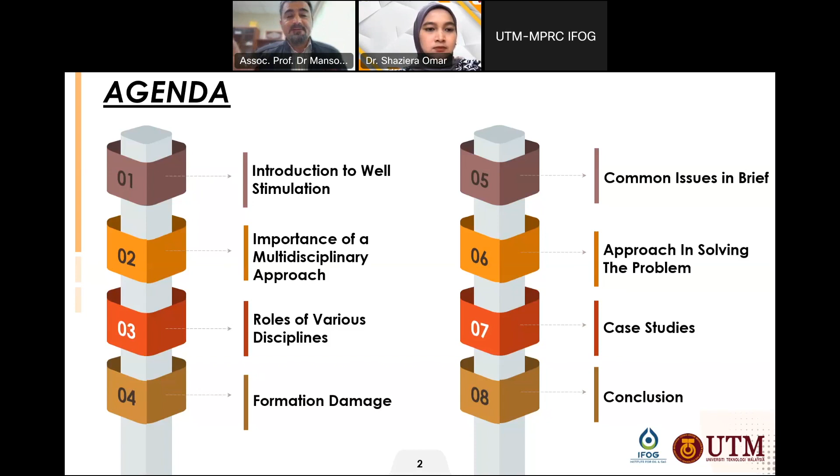So this is the agenda. We'll start with an overview of well stimulation, followed by why a multidisciplinary approach is crucial. Then we'll delve into the roles of different disciplines in the process, discuss how we can enhance stimulation effectiveness. We'll also touch upon formation damage, and specifically for scales and precipitates, an approach to solving the problem, before diving into some case studies, and we will wrap up with our conclusion.

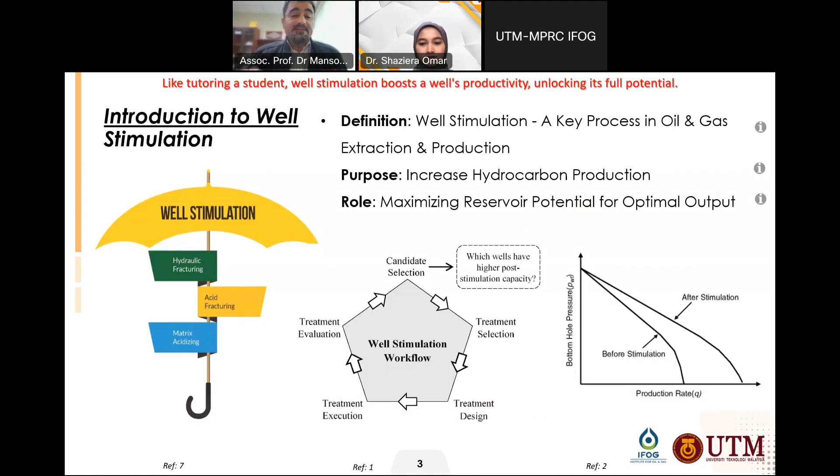Well stimulation at its core is a process designed to enhance the productivity of oil and gas wells. This process involves various techniques aimed at increasing the connectivity and permeability between the reservoir and the wellbore.

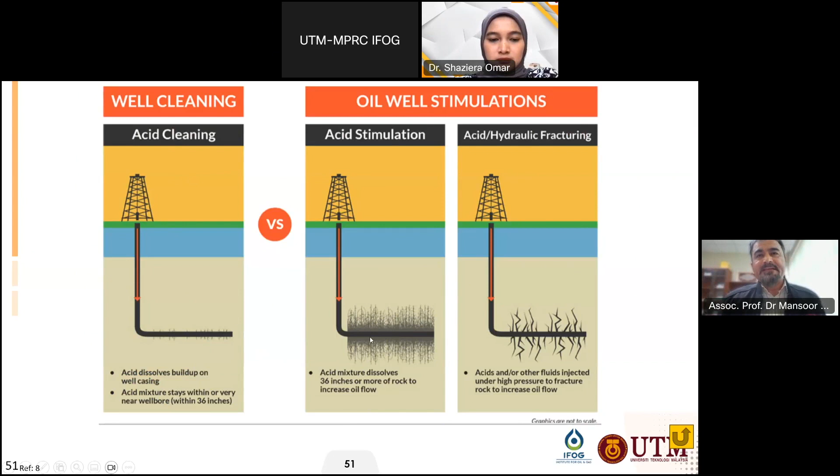Here you can see well stimulation techniques - this represents our reservoir, and this is our wellbore. The main difference between well cleaning and well stimulation is that for cleaning, the acid remains near the wellbore, but for well stimulation techniques, the acid will actually penetrate deeper into the reservoir, depending on the pressure applied.

Let's go for the purpose - why do we actually need to stimulate wells? The ultimate goal here is to increase the production of hydrocarbon. Over time, the natural flow of hydrocarbon may decrease due to various factors. Well stimulation serves as an intervention to ramp up the production.

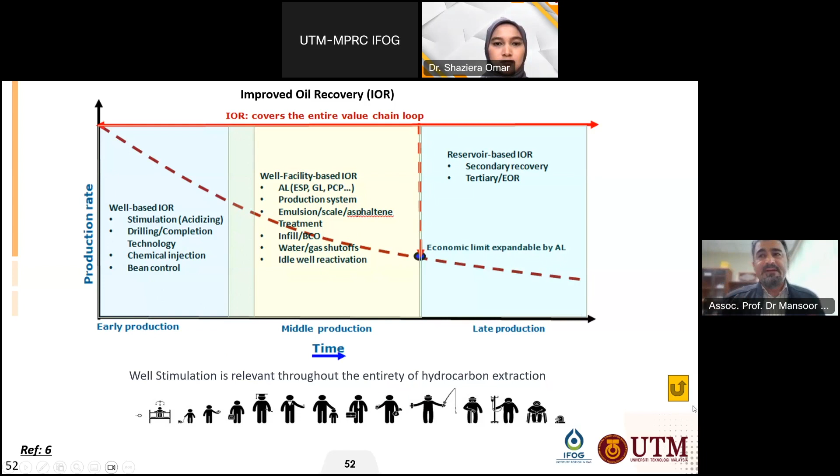Just as education and exercise enhance human development and longevity, well stimulation optimizes the productivity and lifespan of hydrocarbon reservoirs. Both processes aim for peak performance over the course of the life of the reservoir. As you can see, this is a plot showing production rate versus time, and in each production phase, we need well stimulation to increase production, depending on the presence of damage. So it's relevant throughout the entire hydrocarbon extraction process.

Now let's focus on the role of well stimulation. Maximizing reservoir potential is the key. Think of it as getting the most out of the fruit juice - you want to squeeze it until the last drop, right?

Similarly, well stimulation ensures that the maximum possible hydrocarbon is extracted from the reservoir, leading to optimal output and efficiency. On our slide here you can see a flow chart that depicts various types of stimulation. We have hydraulic fracturing, acid fracturing, and matrix acidizing.

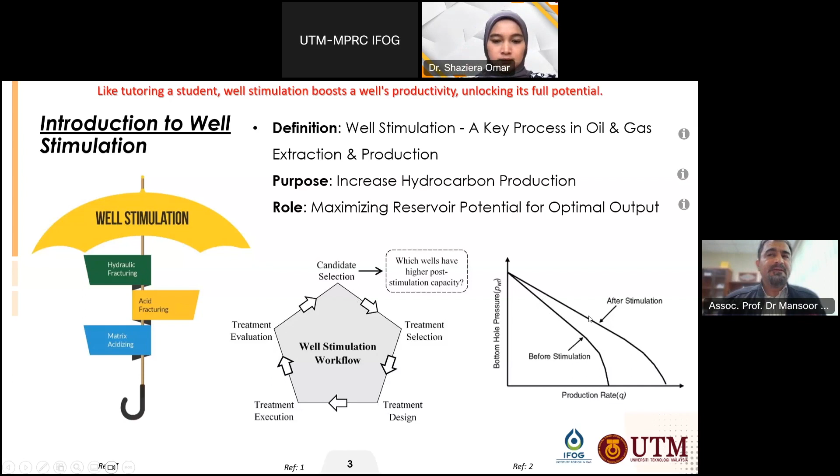And of course, we have a workflow that shows actually different processes and steps in well stimulation, starting from candidate selection to treatment evaluation. And finally, this chart shows how stimulation can increase production.

This is really showing the inflow performance relationship for a well after and before the stimulation. So the importance of the multidisciplinary approach. Today we're going to tackle the multifaceted world of well stimulation. Optimizing well stimulation and maximizing reservoir potential is not a one-man job, or rather a one-discipline job. It requires collaborative expertise from several fields: flow assurance, geology, geomechanics, chemistry, and other disciplines. All of these fields of expertise play an essential role, much like key components in the complex mechanisms of well stimulation. Flow assurance

ensures reliable flow of hydrocarbon. Geology actually provides us with understanding of reservoir and physical and chemical makeups. And then geomechanics offers insight into the behavior of rocks under changing physical and environmental stresses.

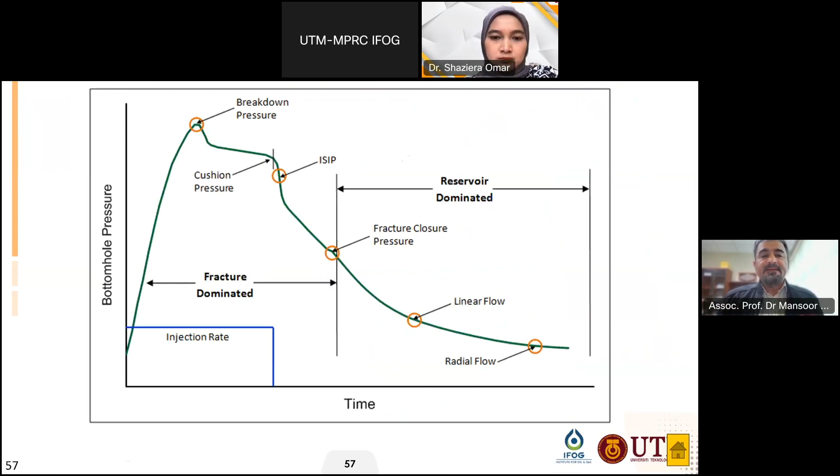And then we go for the chemistry. Chemistry is also very important, that aids in selecting the best stimulation fluids. Economics also helps in analyzing cost effectiveness and return on investment. And finally, artificial intelligence brings forth advanced algorithms and models to predict, optimize, and control the stimulation process.

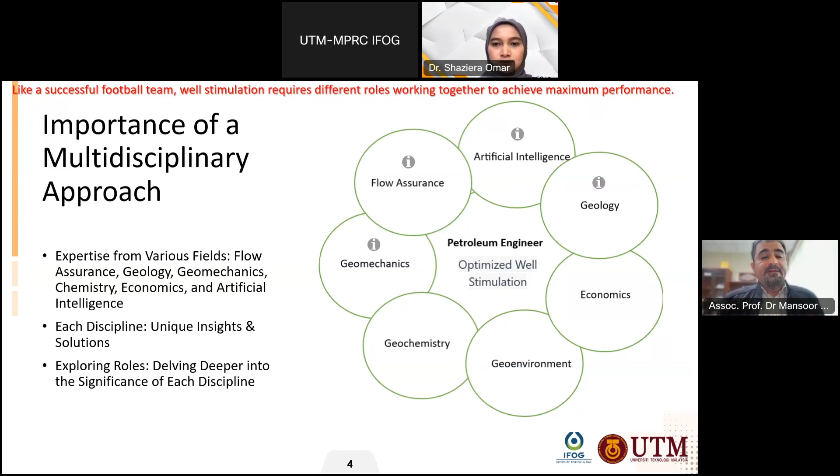When these distinct components collaborate, they propel the system towards the best possible well stimulation and the highest potential of the reservoir. In the coming slides, we will explore the unique role each of these disciplines plays, their interplay, and their collective contribution to the goal of well stimulation optimization.

Okay, why is a multidisciplinary approach a must in optimized well stimulation? The oil and gas industry, specifically the process of well stimulation, is a complex beast, no doubt. There are multiple variables, intricate geological considerations, operational nuances, economic implications, and let's not forget the evolving technological landscape with artificial intelligence making its mark.

That's where our superheroes, flow assurance, geology, geomechanics, chemistry, economics, and artificial intelligence step in. Each discipline offers a unique set of tools and perspectives that individually can tackle parts of the problem. But there's an interesting part.

These disciplines are not isolated islands. They're more like an archipelago, a group of islands closely scattered in a body of water. The challenges they tackle are interconnected, much like an ecosystem of an archipelago. A solution from one discipline can significantly impact the problem seen by another.

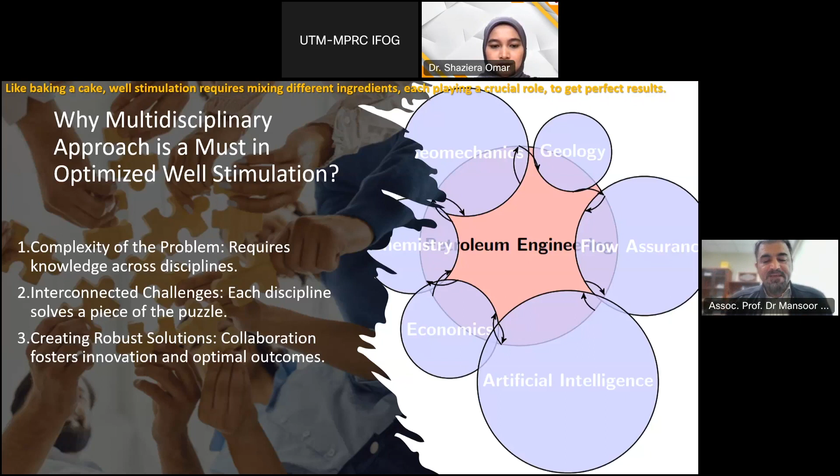So now, when we approach these interconnected challenges with a multidisciplinary lens, we are not just creating isolated solutions. Instead, we are actually fostering a collaborative environment that allows for a much more robust, innovative, and optimal solution for well stimulation. So the need for a multidisciplinary approach in well stimulation isn't just important, it's absolutely crucial to navigate the complexity and deliver the best results.

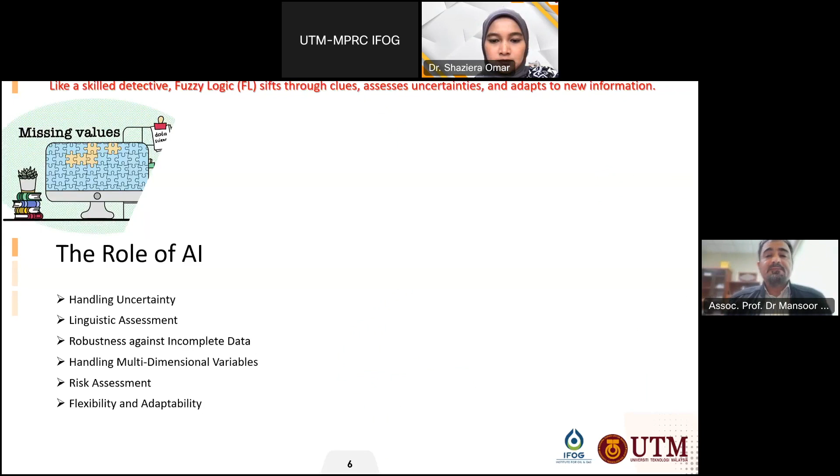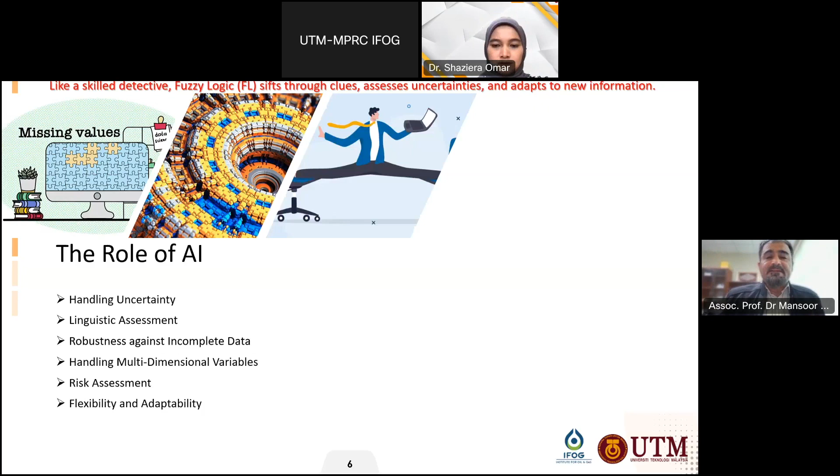So this is the role of artificial intelligence. Artificial intelligence can handle uncertainty. Fuzzy logic, for example, manages vague data, suitable for uncertainty management and linguistic assessment. I give you fuzzy logic because I have a case study I want to show. Fuzzy logic models subjective assessment, flexible for linguistic uncertainties in candidate selection, robustness against incomplete data. Fuzzy logic handles limited data robustly, ensuring reliable screening decisions, and handles multidimensional variables.

Fuzzy logic actually integrates diverse factors for comprehensive candidate selection, for example, for hydraulic fracturing, with flexibility and adaptability. Fuzzy logic can adapt to new data, refining the candidate selection process in the stimulation workflow.

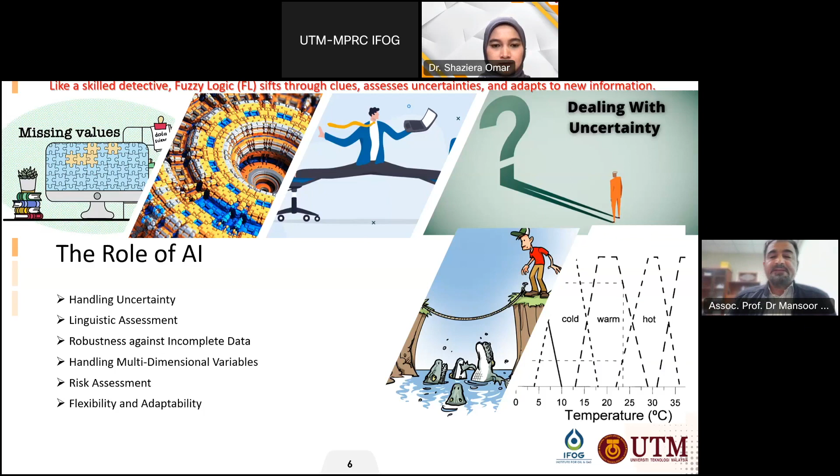The role of flow assurance for deposition and scale management. I just included a sentence here, you can read through and understand the definition of flow assurance. For deposition and scale management, consider high salinity. So I'm going through each one of these items: deposition and scale management, dynamic simulation, equipment compatibility, chemical treatment, and also a case study.

So for the first one, flow assurance engineers can mitigate this issue by implementing scale inhibitors that prevent the formation of these scales, thereby ensuring smooth flow of hydrocarbon. Of course, you need to know that in order to access the wellbore, we need to remove this kind of scale. So this is the role of the flow assurance engineer.

The next one is dynamic simulation. Let's take a look at deepwater fields with cold conditions. These conditions are conducive to hydrate formation, which can block pipelines and disrupt production. Flow assurance professionals use multi-phase flow simulation tools to forecast hydrate formation and design strategies to prevent it.

Equipment compatibility is another area where flow assurance plays a significant role. For example, in sour wells containing high amounts of CO2 and H2S, corrosion can be a severe problem. Flow assurance engineers can select corrosion-resistant alloy tubing to resist these corrosive agents to ensure longevity of the well and its equipment. As for chemical treatment, consider wells producing crude oil with high paraffin content.

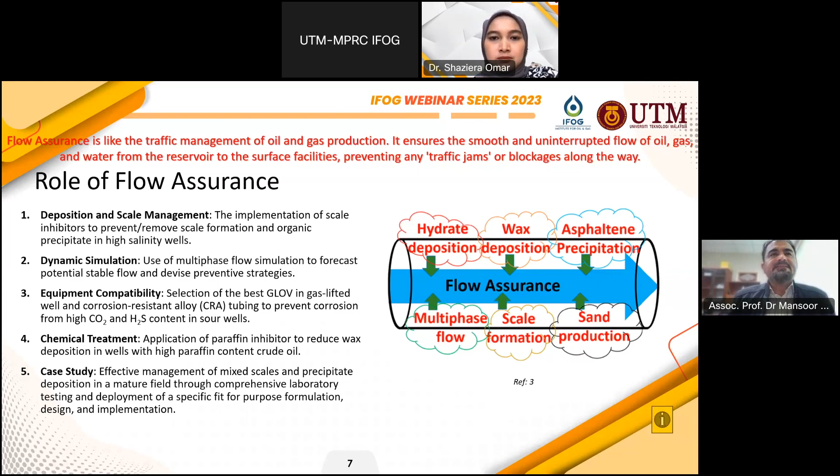So this is the role of geology. In the context of well stimulation, geology offers essential contribution beyond general reservoir characterization. Let's focus on specific aspects such as mineralogy, sedimentology, and characteristics of natural fractures and faults. We are going to cover the first three topics.

Detailed mineralogical analysis is critical for effective stimulation. For instance, in a sandstone reservoir rich in silicate minerals, a comprehensive mineralogical analysis led to the selection of hydrofluoric acid for stimulation, resulting in an improved flow rate.

Clay minerals can also present a significant challenge. These minerals can swell or disperse in response to stimulation treatment, leading to formation damage. However, geologists can identify the presence of these minerals and preventive additives can be introduced. One common preventive measure is the use of potassium chloride, KCl, which can stabilize clay minerals and prevent this adverse reaction.

Similarly, chlorite minerals that contain iron can react in the presence of strong acids, often used in stimulation treatment, leading to changes in permeability. This can impact the effectiveness of stimulation. However, by understanding the mineralogy of the reservoir, acid inhibitors can be introduced to control these reactions.

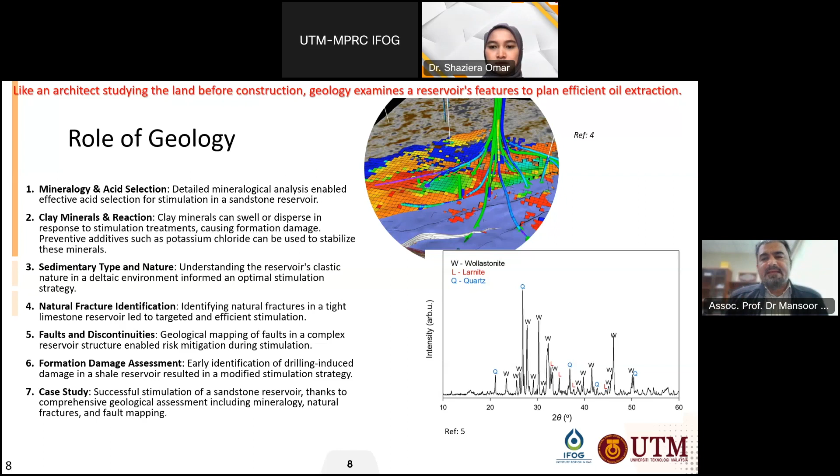Role of geomechanics. Geomechanics plays a vital role in optimizing well stimulation. Let's explore some key ways geomechanics contributes to this process. Firstly, stress analysis is crucial. Geomechanics helps in identifying in situ stresses, providing valuable insight into fracture initiation and propagation. These insights can influence the design and execution of stimulation strategies, helping to optimize the results.

Next, understanding the mechanical properties of the reservoir rock is very important. Parameters such as Young's modulus and Poisson ratio can aid in predicting how the reservoir will respond to stimulation. For instance, rocks with high Young's modulus are stiff or brittle, and are more likely to fracture, a factor that can be leveraged in hydraulic fracturing operations. We also have borehole stability, and I'm going to present a case study published in a journal.

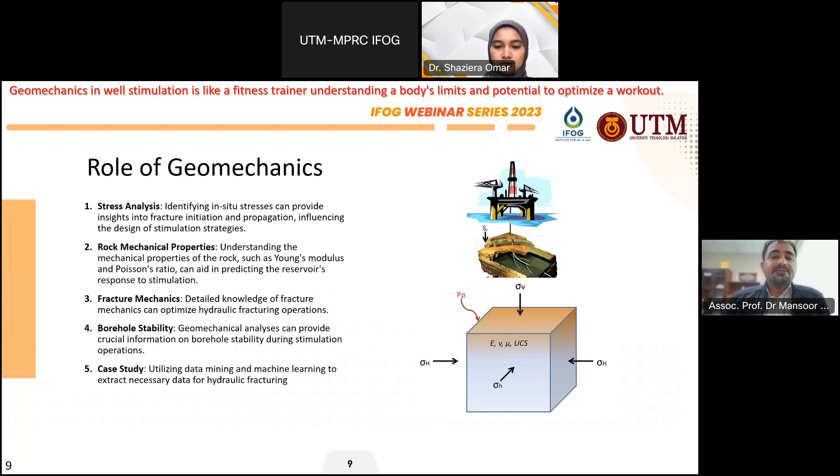The role of chemistry: we are going to discuss the pivotal role of chemistry in well stimulation. Firstly, stoichiometry is crucial and very critical. It allows us to predict the outcome of chemical reactions involving well stimulation. By understanding the quantities of reactant needed, we can optimize the process, avoid wastage, and minimize adverse environmental impact.

In this reaction, as you can see, 2 moles of hydrochloric acid react with 1 mole of calcium carbonate. This produces 1 mole of calcium chloride, 1 mole of carbon dioxide, and 1 mole of water.

Next, let's talk about kinetics. The rate at which chemical reactions occur in well stimulation can greatly impact the efficiency and success of the operation. Fast reactions might lead to premature acid spending, while slow reactions might not deliver the desired stimulation. Therefore, understanding and controlling this kinetics is essential.

Let me give you an example. This kinetics is very important for designing the stimulation process in sandstone and carbonate. These rocks can react to the acid with different reaction rates. As you can see here, the kinetics for this reaction might look something like this.

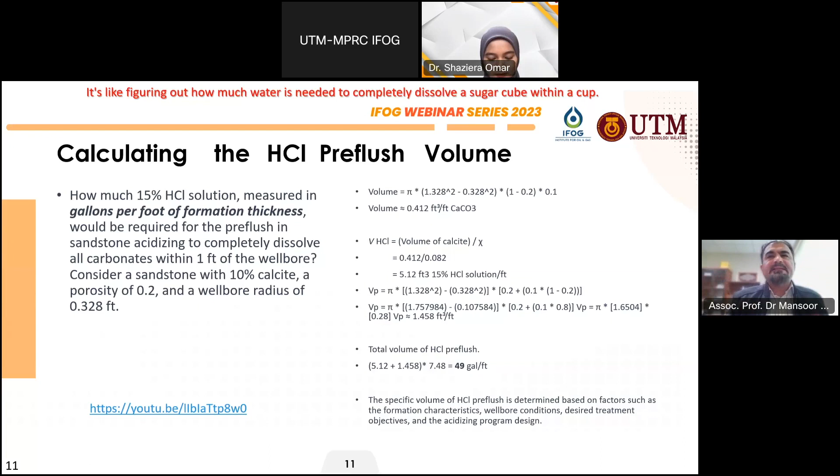Okay, so the rule of economics. In this segment of our discussion, we are going to shift our focus to the rule of economics in well stimulation. First on our list is the cost-benefit analysis.

Well stimulation is an investment, and all investment involves cost and potential benefits. The cost includes the direct expense of the stimulation process, such as cost of chemical, equipment, and labor. The benefits are the increased production of oil and gas that results from the stimulation.

A detailed economic analysis can help determine whether the potential increase in production justifies the cost of a stimulation.

For example, a company might estimate that a hydraulic fracturing operation will cost $1 million, but it could potentially increase the production by an additional 50,000 barrels of oil. If the market price of oil is $70 per barrel, the increased production could result in additional revenue of $3.5 million. After subtracting the cost of the operation, the net benefit would be $2.5 million. This is a simplified example, but it illustrates the kind of calculation involved in cost-benefit analysis.

Next, we have risk assessment. Well stimulation, particularly techniques like hydraulic fracturing and acidizing, involve risks. This includes the risk of well failure, the risk of environmental contamination, and others, like the BP well in the Macondo wells. These risks can have economic impacts, such as the cost of cleanup efforts or potential legal liabilities. An economic analysis can help quantify these risks and factor them into the decision-making process.

Okay, formation damage. Formation damage refers to the change in the area of the formation near the wellbore, the wellbore region. So this is the definition of formation damage.

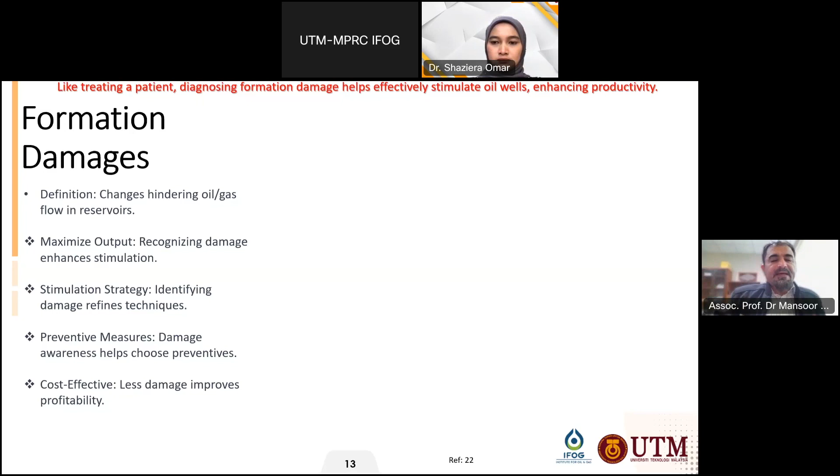Understanding and addressing formation damage is important in well stimulation for several reasons. Maximizing production, well stimulation techniques like hydraulic fracturing and acidizing aim to increase the permeability of the reservoir, optimize stimulation strategies, and minimize future damage through predictive analysis.

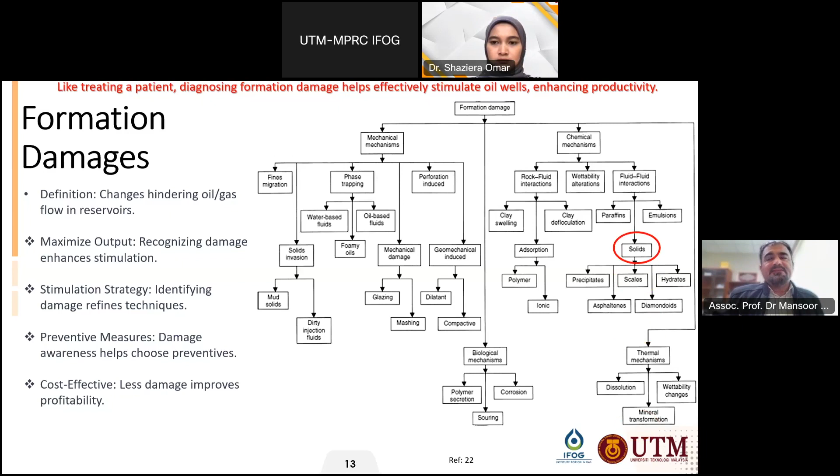Here in this chart, we have classified formation damage into mechanical damage and chemical mechanisms. We are going to focus on the solids, which are precipitates and scale, in the later slides, and dig into this kind of solids.

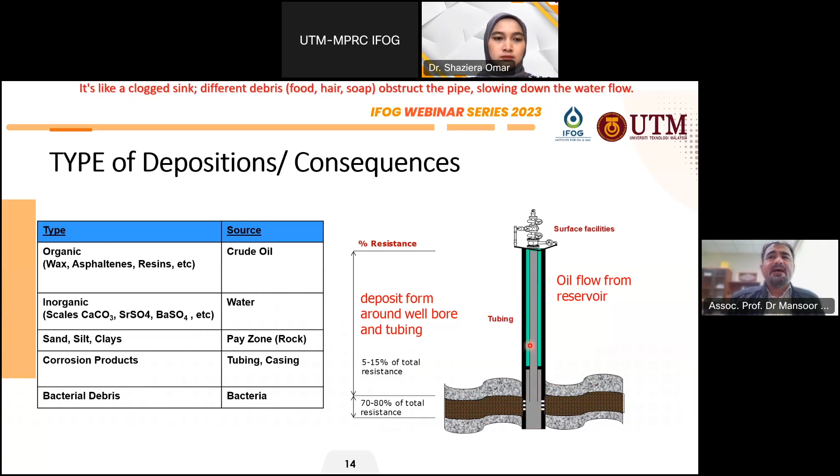And then we have classified this arbitrary classification. The majority of resistance is around the wellbore, which is where well stimulation takes place, and this is the aim of well stimulation, to remove this kind of damage. About 5 to 15% of the total resistance is happening in our tubing and surface facilities. Okay, so this is an example.

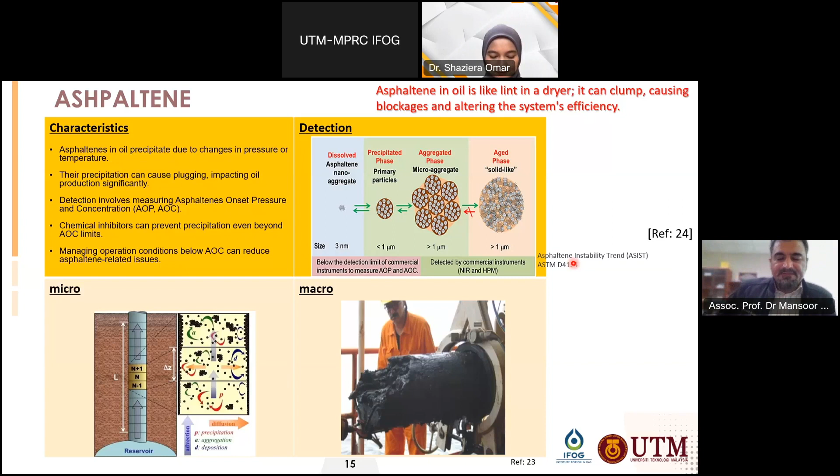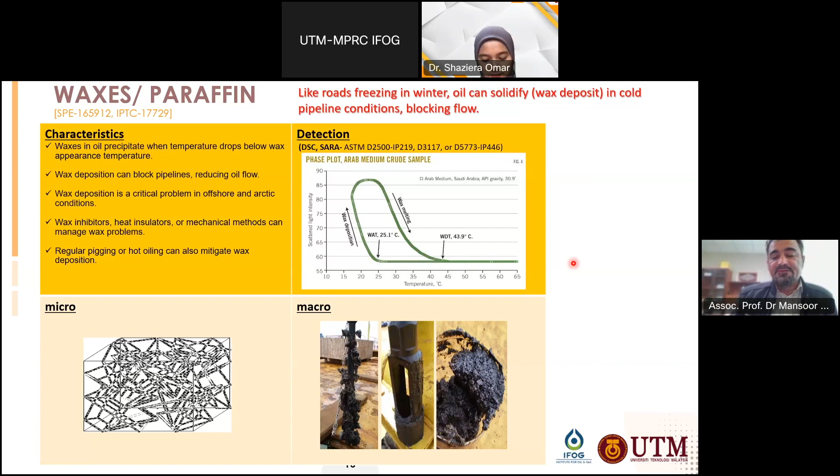And of course, for detection, we can use differential scanning calorimetry. We can use the SARA test. We can use ASTM D2500, IP219, a test from the Energy Institute - it's about the cloud point. And then ASTM D3117, the standard for determining wax appearance point of distillate fuels. And also we have ASTM D5773 or IP446, standard test to determine cloud point of petroleum product and liquid fuel using automated instruments.

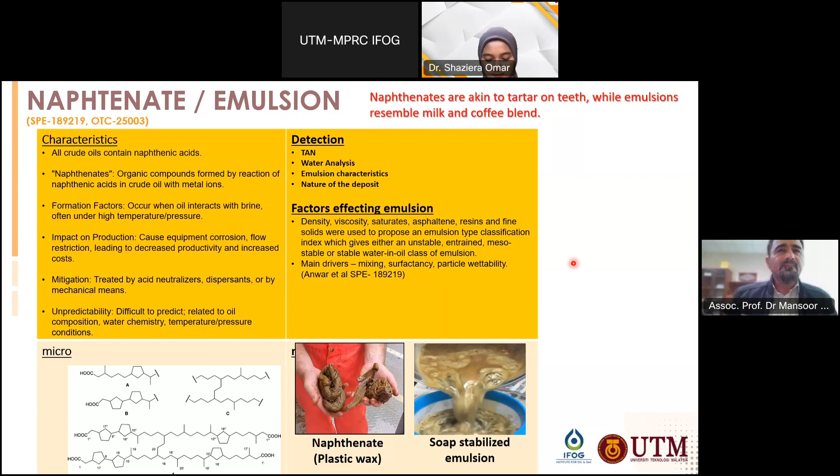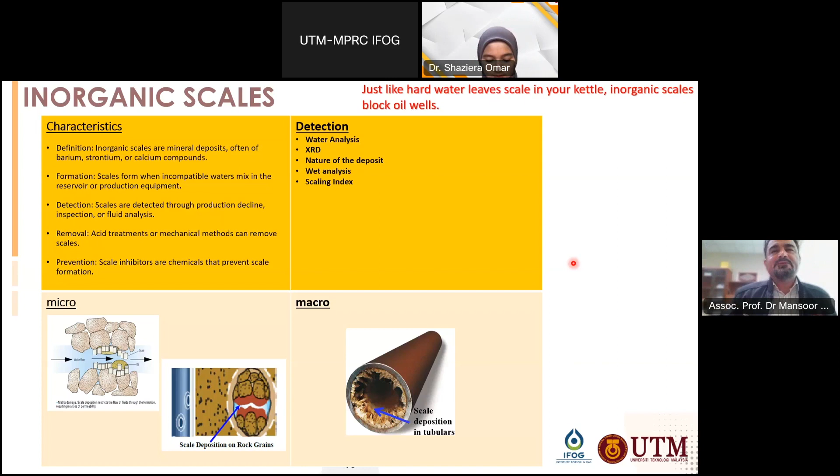How can we detect it? Of course, water analysis is very important. XRD to know the component, and also the nature of the deposits, whether it's calcium carbonate or barium sulfate. The pH is very important and directly related for calcium carbonate, but for barium sulfate, since it's not actually solvable or dissolving in water, pH is not important. Wet analysis and the scaling index will also be used. Simulation is also very important, using ScaleChem and other packages.

So what is the approach to solve the problem? We have reservoir and production data analysis, laboratory data, history matching, and we can go for parametric study and design of experiment. The purpose of all these approaches is to understand the problem, to know whether it's organic or inorganic, what type of formation damage it is, whether it's from fines or emulsion. This kind of diagnostics needs to be done to know the problem, then devise and come up with a solution appropriate for that problem. And of course, we need to conduct economic analysis to know the benefits of conducting this operation.

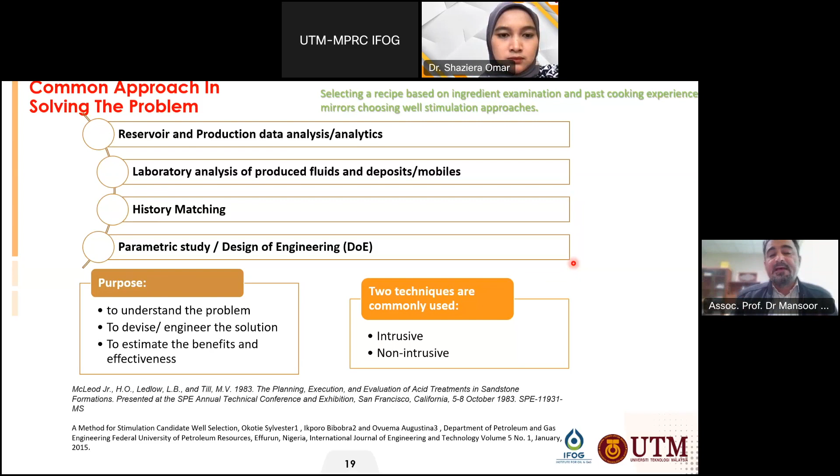These techniques can be used intrusively and non-intrusively. Non-intrusive involves laboratory analysis, fluid analysis, temperature and pressure logging, chemical treatment, reservoir simulation, and design of experiment. For intrusive methods, we have scale removal, reperforation, and acid treatment.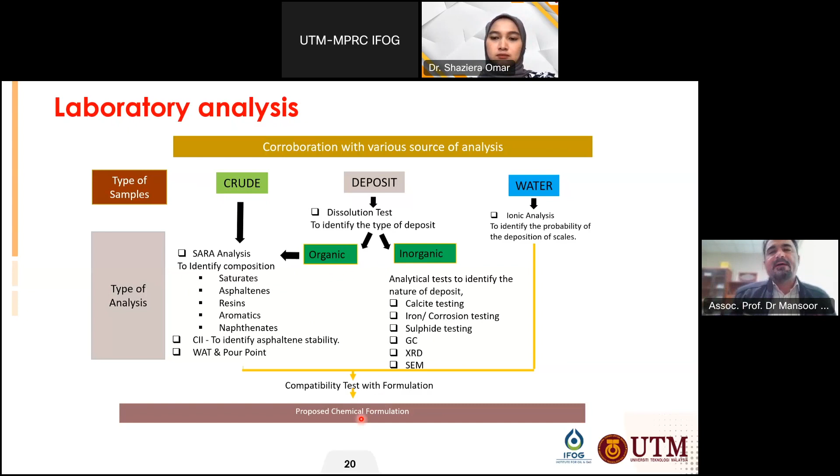If it's inorganic, we need to conduct this kind of test. If it's organic, we need to go for this kind of test. And then we need to do a compatibility test with the formulation. Based on this compatibility test, we will propose the chemical formulation for this type of problem. These are the laboratory analyses that will be conducted based on this standard.

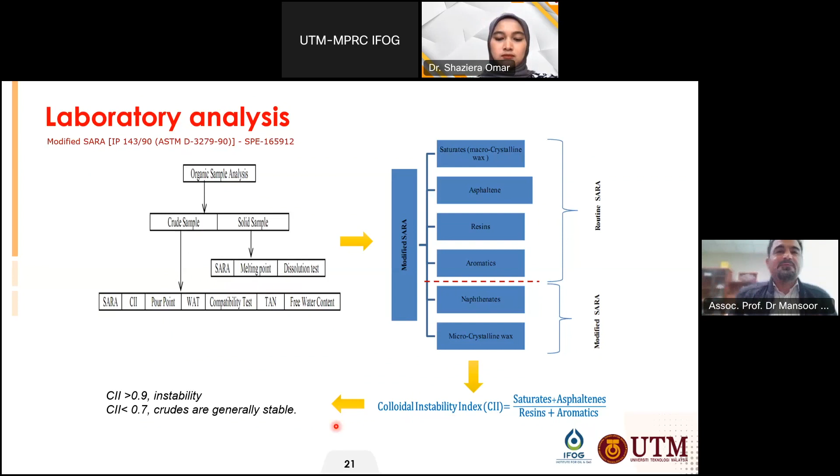For the modified SARA analysis, we include naphthenate and microcrystalline wax, and we have CII, the colloidal instability index. Based on that, if the CII is more than 0.9, it shows instability. If it's less than 0.7, it shows that the crude is generally in a stable state. This kind of analysis will also be conducted in the laboratory to come up with the final formulation to treat the well.

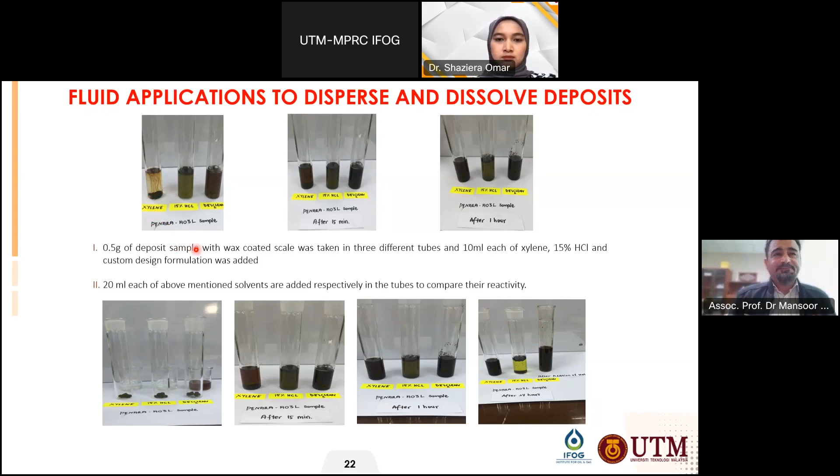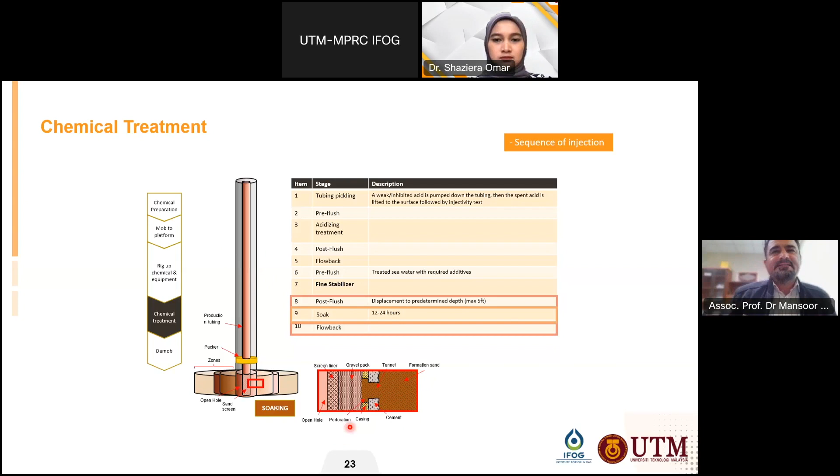And so this is a general illustration of how this kind of process is used. Okay, and then this is just a demonstration of a technology for those who are not expert in this field. I want to show you how this fine stabilizer will actually be working in the subsurface.

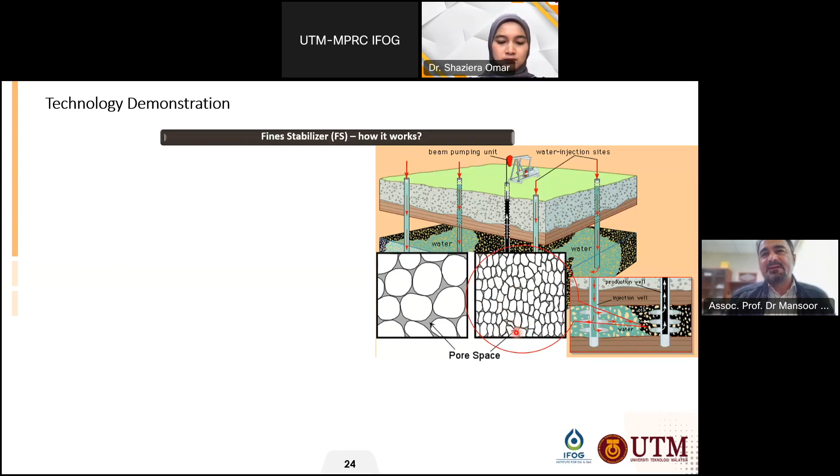Consider a subsurface strata, and then from this subsurface we take a small sample of the pores. All of you know that this is actually the porosity, and the pore space in the subsurface. Normally, the fines are originated from these rocks.

And then they will migrate through these pores and reach our well. So in this case, I'm going to illustrate how the fine stabilizer shown in the previous slide will work. So this is our well, located here, and here are our pores. An example of this.

As you can see, in normal production, fines are produced into the wellbore. So when we inject the fine stabilizer, it will be injected into the pore space. It will be soaked for 12 or 24 hours. After that, it will flow back, and all of the fines will be flocculated and coagulated. And then after that, we are having a flow that is free of fines.

Just for your understanding, this technology is taken from water treatment. So we adopt this kind of technology from water treatment to environmental engineering to subsurface, and it's widely used in well stimulation.

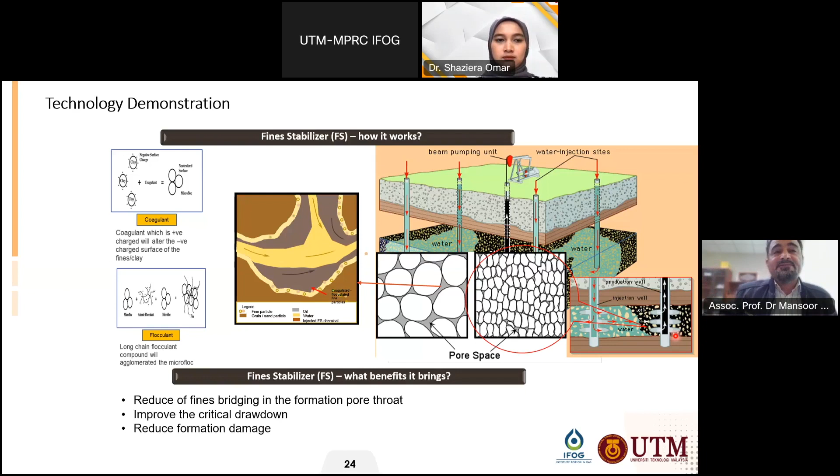That's why we are not going to impose much more drawdown on our well, because of the danger of producing sand into the formation, and also to reduce formation damage.

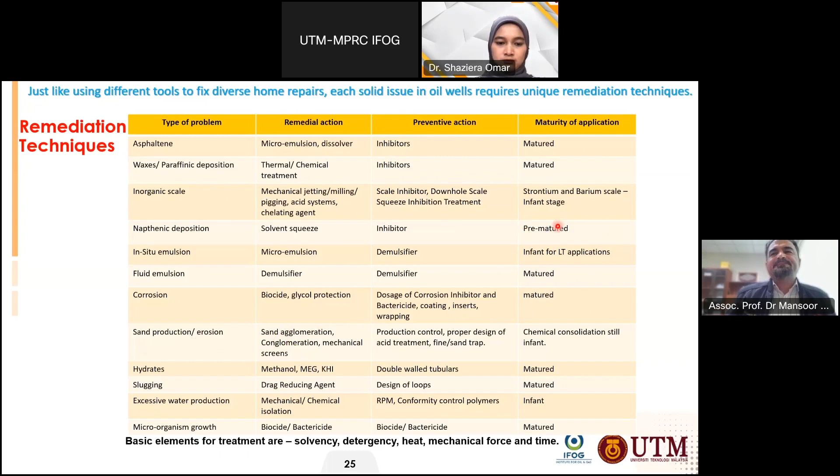For waxes and paraffin deposition, there are thermal and chemical treatments. And of course, for the preventive side, we have inhibitors. And others, as you can see in these tables, showing the prevention and remedial action and the state of each of these technologies in the market.

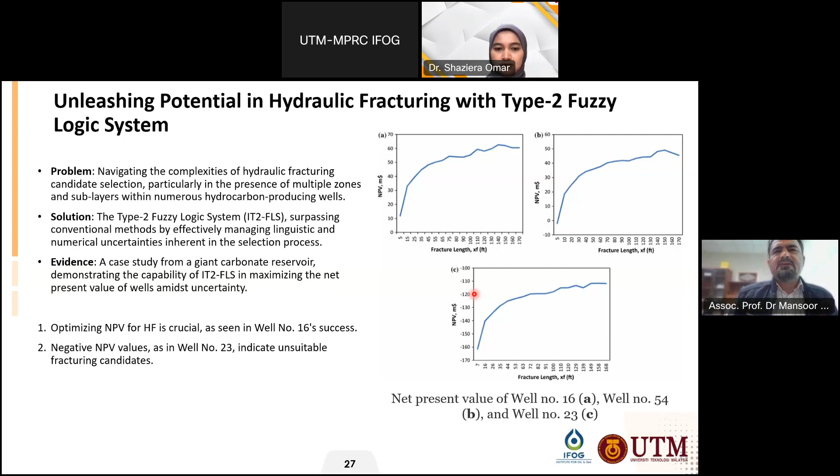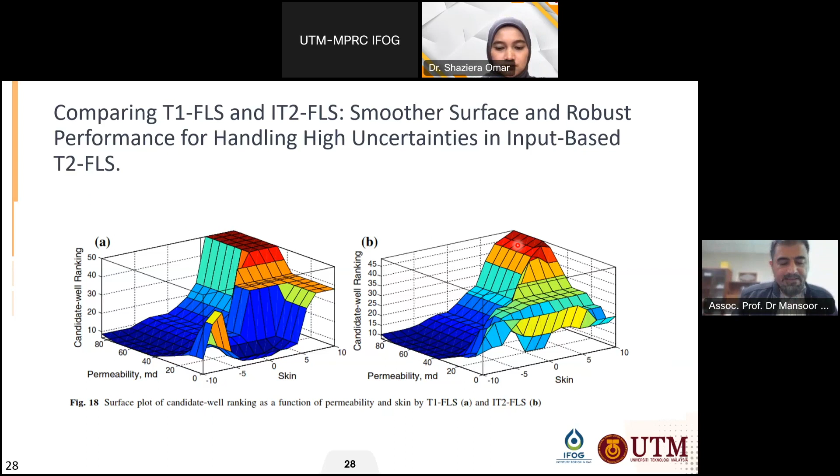So case study 2 is also published in the Journal of Petroleum Science and Engineering. This is an integral approach in determining rock properties from well logs in heterogeneous carbonate rock.

What was the problem in this case? We faced a challenge developing a field for potential stimulation activities, where continuous log data isn't available for all wells. There was a lack of well logs, limiting our understanding of the field characteristics. Critical to this development is the acquisition of rock elastic properties or log elastic data for constructing an accurate stress profile and determining Young's modulus and Poisson's ratio.

So our task is to devise a strategy employing techniques that enable us to accurately infer or extrapolate the necessary geological and rock properties, ensuring a reliable basis for assessing the field's suitability for stimulation. As you can see, we used three methods in coming up with this.

Actually VP or compressional wave data. After that, we validate the results with leak-off test data and lab or UCS data, and then compare the results. VP was validated by one well log, and then we came up with the VS or shear data based on the VP data, and then, based on current correlations, we determine the Poisson ratio, shear modulus, and Young's modulus.

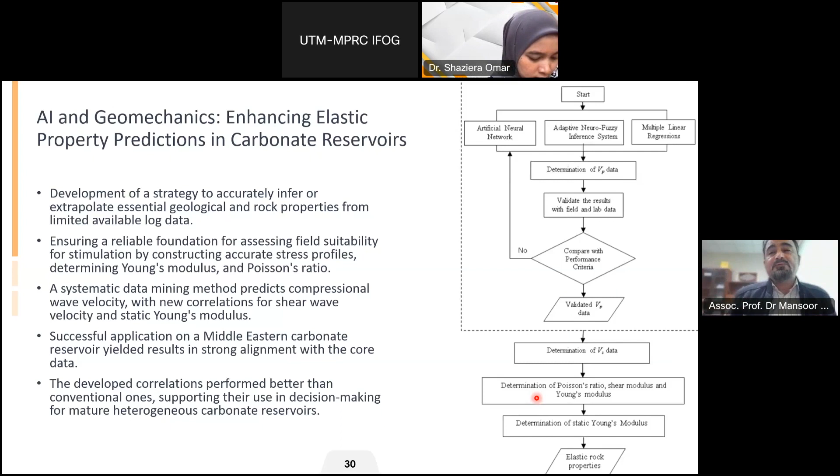Of course these are dynamic data, so we need to turn them into static Young's modulus. Finally, rock elastic properties are achieved, and we've been able to come up with stress profiling and the design of experiments.

The third one is experimental characterization of a new high strength, ultra lightweight composite proppant derived from renewable resources. We have a patent for that, but the good thing is this is a multidisciplinary approach involving material science, numerical analysis, strength analysis, and using renewable resources was one of the advantages of this work.

To give you perspective, in hydraulic fracturing, proppant is very important, as is the hydraulic fracturing fluid. Fracturing fluid is normally injected into the well at high pumping rate, which causes fracture to form in the formation. In order to prevent this fracture from closing, we need to pump certain materials that can prevent closure of the fracture. That's why we call it proppant.

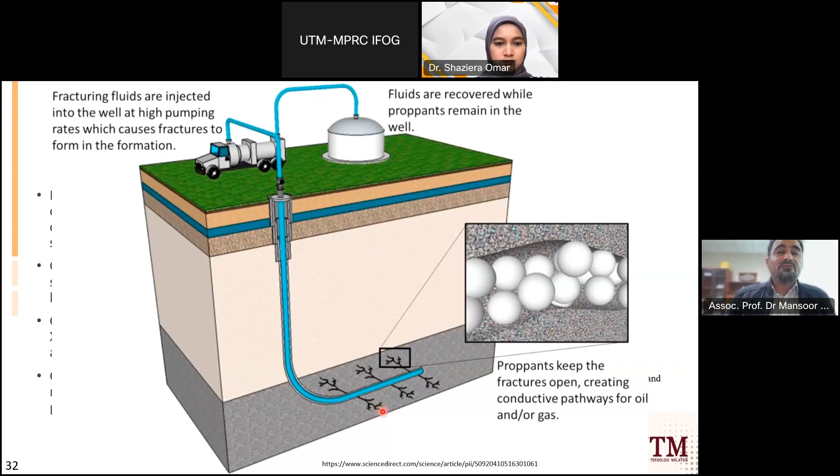So proppant needs to be injected down there to prevent closure of these fractures and provide a pathway for fluid to migrate from the reservoir to the wellbore. In this project, we developed a proppant for hydraulic fracturing with deformable substrates and high compressive strength.

It was excellent, of course. It has low specific gravity, high crush resistance, and also better fracture conductivity. We did characterization such as FESEM, SEM, XRD, TGA, and also consulted several people about polymerization, surface modification, and other material properties.

At the end, as you can see, the fracture conductivity test was performed, and it shows that this product outperforms the comparative product in the market, which is Ultra Lightweight 1.25 from Baker Hughes. It shows it can withstand higher pressure, up to 6,000 psi in the subsurface.

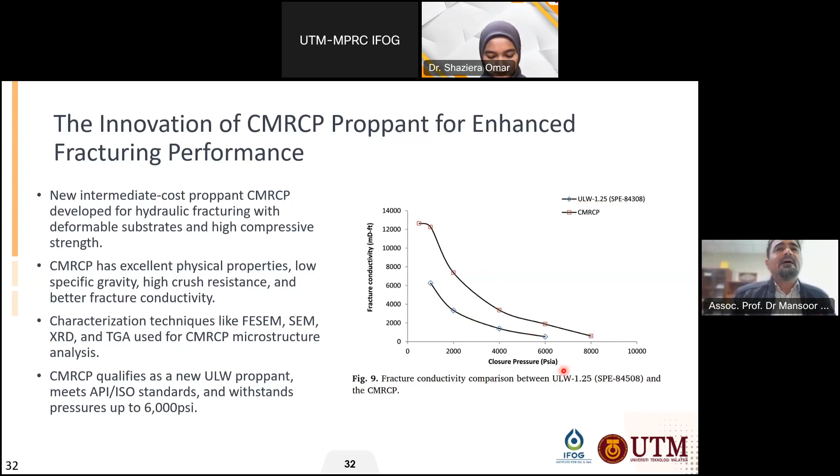Okay, so case study 4. Well A is a dual string producer well. The well was shut in due to low production, and also suspected completion skin and reduced PI due to the attraction of colloidal, mobile, and deposit material.

This was due to the drilling fluid used, causing formation plugging, and there was no breaker pumped to dissolve this drilling fluid. There were also traces of naphthenates recovered during the intervention job.

The deposit sample was black in color and looked like a tar ball, with no sharp melting point at 98 degrees Celsius. This shows that the absence of a sharp melting point could provide useful clues about the nature and composition of the substance.

It could suggest the deposit is a mixture of different compounds, or that it has a complex molecular structure. This might influence how the deposit can be handled or treated in a well stimulation or intervention job. We conducted a preliminary dissolution test that showed minor dissolution of low molecular weight organics.

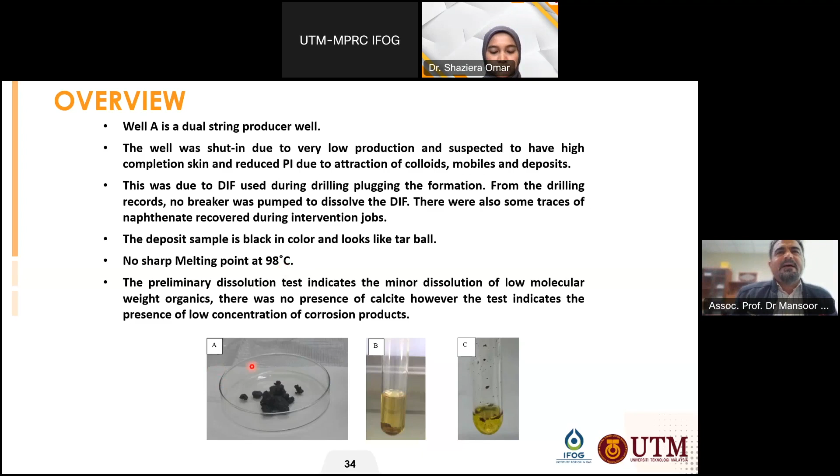Okay, and then this is the results of loss on ignition, and then other tests conducted for this analysis. We conduct XRD and other tests also conducted in order to know what are the composition.

Saturates. It's composed of macrocrystalline wax and microcrystalline wax, also conducted. SARA test and also modified SARA test is conducted, and then the output of this test actually helps the team to come up with a good formulation.

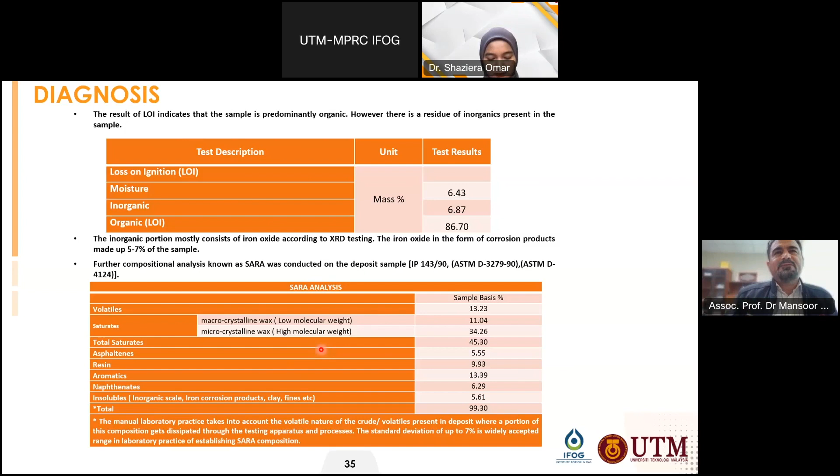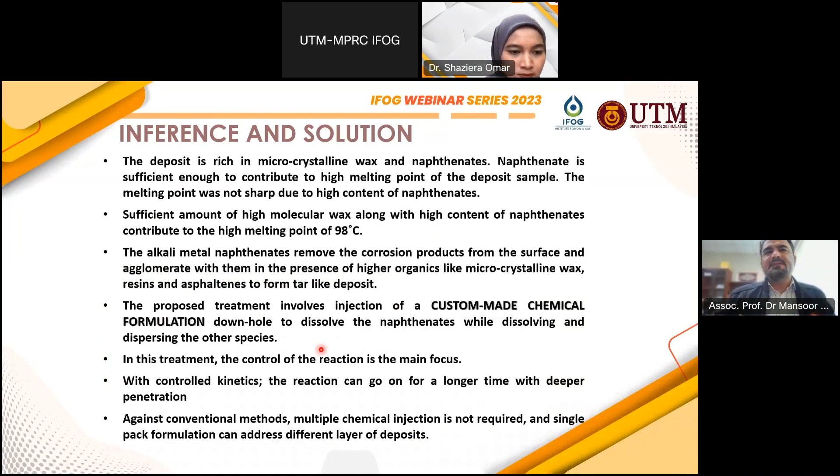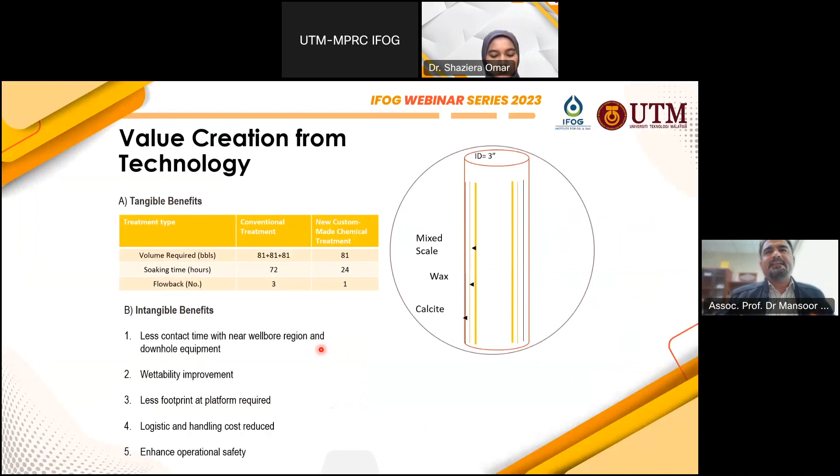So based on that, a custom-made chemical formulation is made for this chemical, and then control of reaction, of course, is very important. This is the results, and this is the case study. Of course, there is a formulation design approach for surfactant, and the value creation, the result of this case study. And this is about the dynamic simulation conducted via Olga.

And then, of course, this is the services that we can do about intelligent data mining, dynamic simulation, innovative treatments. Our team is available to do that for you. And then we have expert consultancy, and of course, there will be some training courses about this. For the conclusion, the multidisciplinary approach is essential for addressing reservoir management challenges, necessitating the combined insights and expertise of

various professionals in the oil and gas industry. So the solution to the challenges are only able to be developed with appropriate diagnostic, prognosis, and inference. Prevention is better, of course, than cure.

Integration of knowledge from subsurface to the surface enables a comprehensive understanding that encompasses various aspects such as reservoir properties, lithology, chemistry, flow assurance, geomechanics, AI, and so forth. So the future of well stimulation is innovative through collaboration. Thank you very much.

And this is the references used, and open floor for question and discussion.

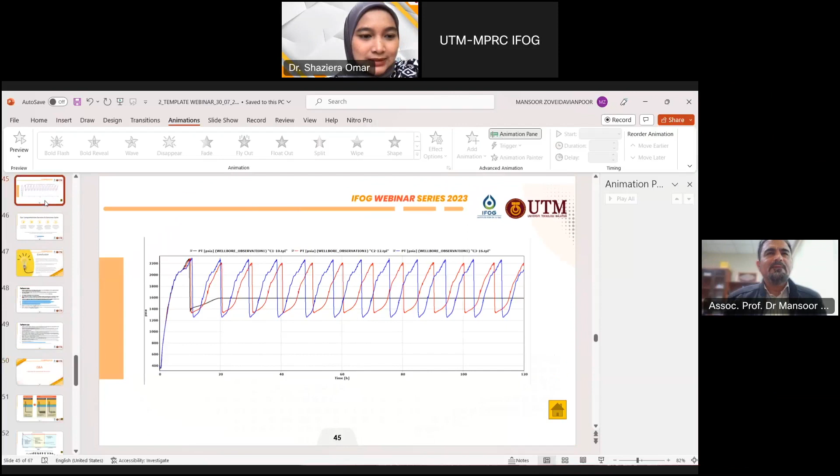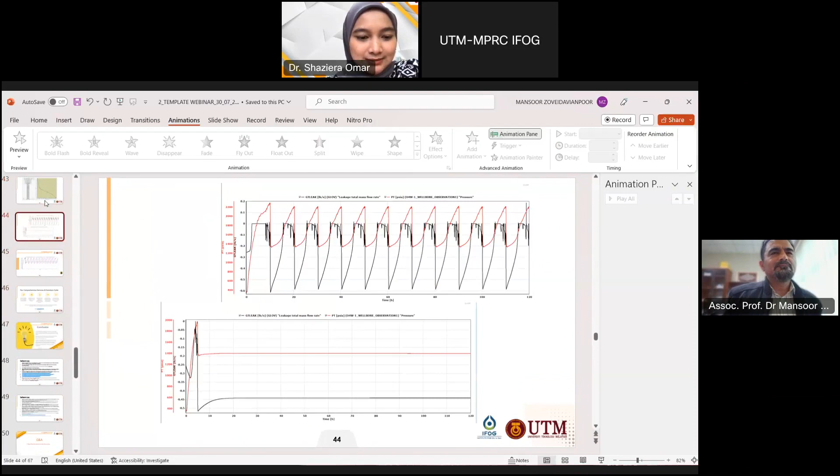So thank you so much for joining. But before that, Dr. Mansoor, maybe you can share the slide again, because we have... Your slide, yeah, at the end of your slide. Which slide? For the last slide. I think for the last slide. Conclusion? No. Or can I share my slide? Yeah, okay, thank you.